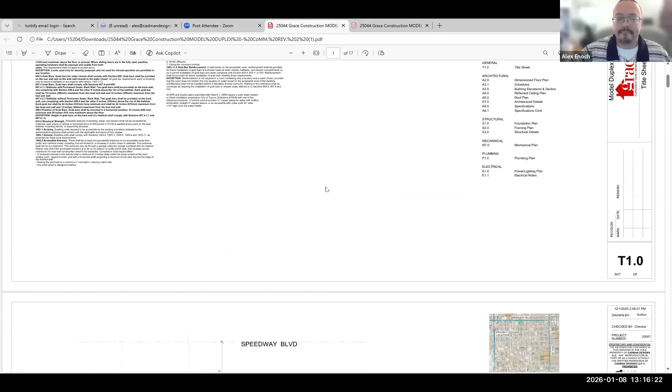Yeah. All right, I mean, there's not a whole lot to go over now that Michael Taku went over it and kind of justified everything. The only thing that would differ from what he described, that I don't think was cleared, is the wall that surrounds the property. We have a 6-foot wall that is solid masonry, but one of the requests from West University was to make sure the wall that fronts 7th Ave, along this side, and blocks in our yard, which is right here, is actually only half masonry, and the rest is wrought iron.

So that way we can actually still visually see the building. But overall, as Michael mentioned, we have Speedway along the north property line. We've offset the building pretty far back from the street edge so that we get away from it because it's going to be pretty loud.

And then, as he mentioned, we have the face of the building facing 7th Ave to create the duplex. And then the request was to do the parking through the alley, so we have the alley here that'll allow us to do the parking here. And as he mentions, a pretty straightforward building, rectangular, white wood.

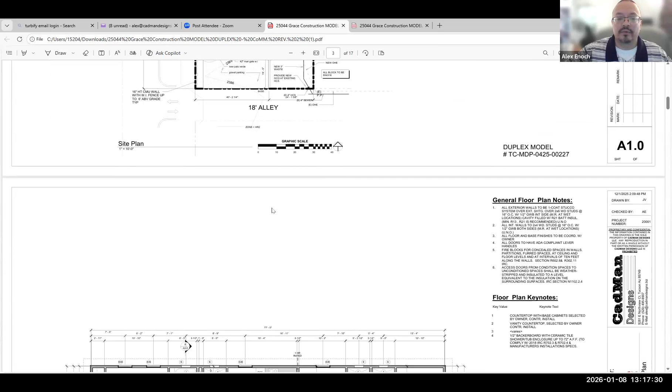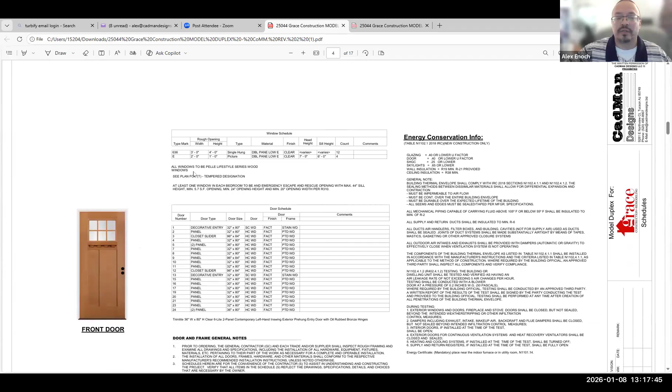Windows. Got one unit at 1260, one unit at 896. We followed the directions of West University, so got the wood door with some glazing on it. We got the Pella wood windows, asphalt shingle roof, pitched, nothing too glaring obvious. We do have the units on the roof. That'd be one deciding factor that you guys might want to put some input on, but the rest of it's pretty much cut and paste. There's nothing too detailed about this building or this lot. Michael pretty much went over everything else.

So I'll leave it open to you guys.

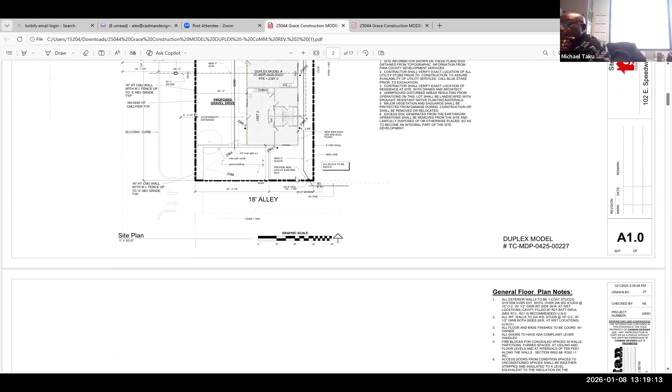So per the guidelines, primary structures need to have porches on facades, especially street-facing facades, and both on corner lots, foundations, things like that. Was that at all discussed? Why were none of those followed per the guidelines for primary structures? The foundation was not specifically discussed during the review in West University.

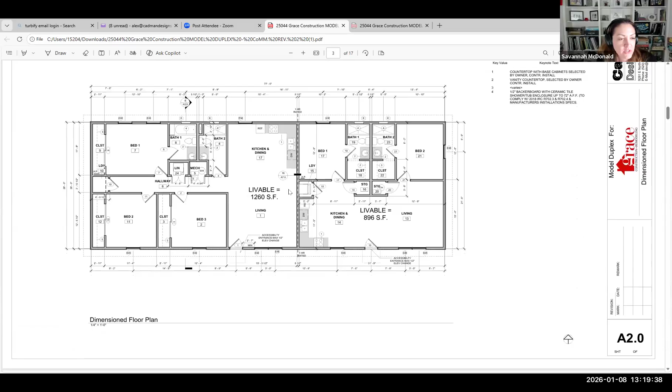And per the guidelines, porches shall be provided on all new primary buildings constructed along street frontages, rear and side porches for buildings located on corner lots. But there's no porches on this building. Correct. Was there an exception for that, or was it just sort of missed? Porches were not really discussed.

Okay. If I make a mistake, Alex, you can correct me. I think it was not discussed. That was never an item of discussion. But I mean, if it's a requirement, we can definitely add it in there. We have plenty of room in what's considered the street front.

Okay, yeah. I mean, just as a starting point, I was trying to make sure before commissioners asked their questions, we understood what the project was beholden to, if it was something different. But I think I understand now.

And then the fences part per university, it's 48 inches height on a front yard, but you're proposing a wall that's taller than 48 inches on the front yard. Yeah, and that's definitely one of the ones they mentioned because of the security, being right up against Speedway. It's an easy to see, easy to hit target house, being that its location. So they were okay to allow us to go taller on that one because of that reason.

But the solid portion is 48 inches or less? 30 inches is what I called it. Okay. Yeah, and then that goes wrought iron the rest. And that's on the plans currently? Oh, 16 inches, I'm sorry, it's right here. Yeah, 16-inch height CMU wall, and then it's wrought iron the rest of the way to 6 feet.

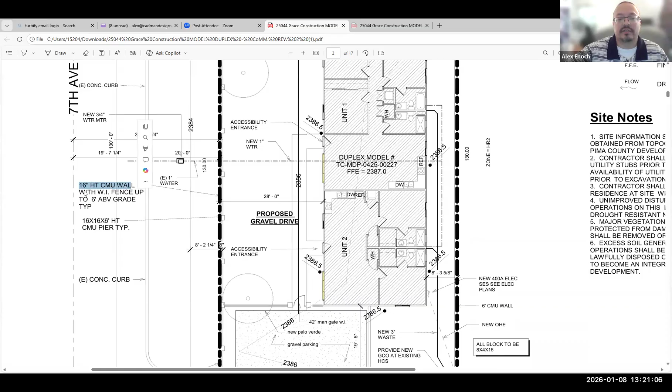Okay, understood. All right, I will let commissioners ask their questions now. Andrew, do you want to start?

Sure. Yeah, I noticed the porch omission as well, and I do think that they should be included at each entrance to Unit 1 and Unit 2. And then the style of that porch, I think the guidelines talk about a wood post on a masonry pier. So I'd want to see something appropriate to the style of the neighborhood, not just a 4x4 post down to a slab. But I think they definitely need to be included.

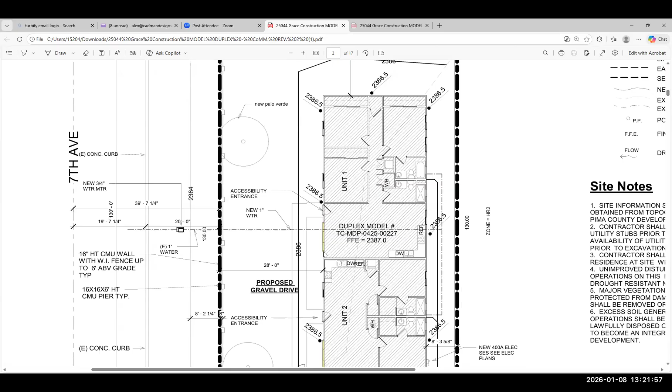And then the only other thing is the rooftop HVAC units. They are allowable, but they need to be placed on the rear of the roof. And right now they're kind of sitting right on the ridge. So I think those units need to be shifted back so that they're as screened as possible from the street. Okay. Yep.

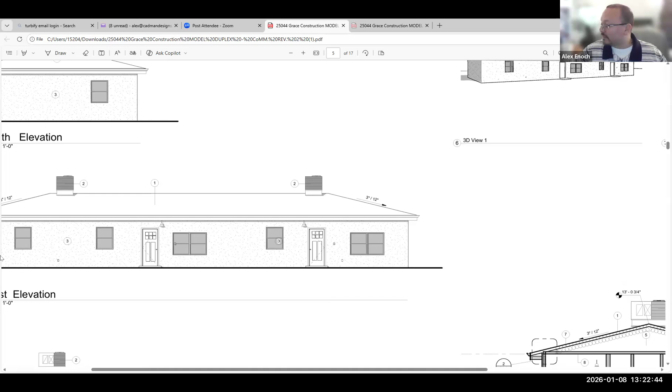The design guidelines talk about window openings stressing verticality over horizontal proportions. Especially on those pairs of windows, I think the sill height is probably okay there, but I'd like to see the vertical proportion a little higher.

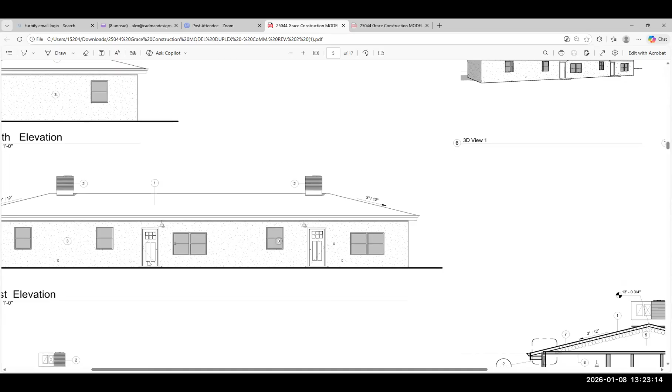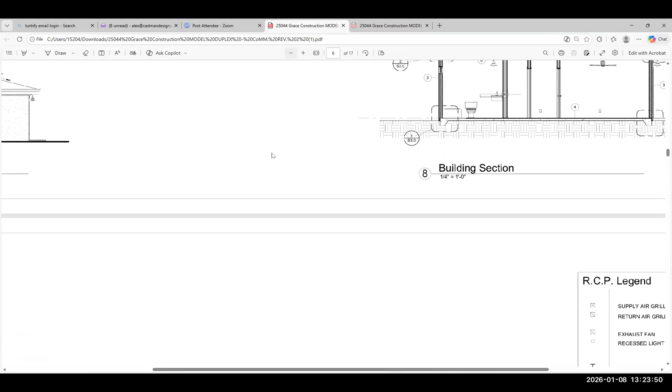Can you clarify the roof overhang? I only saw one building section, and it looks like a closed eave. No, they'll probably just do exposed. That's just the background of the other fascia board showing through. So you've got the fascia coming down, the outrigger, and we do have scuppers and gutters on there. Okay, good, I just wasn't clear on that. The open eaves are definitely appropriate for the area.

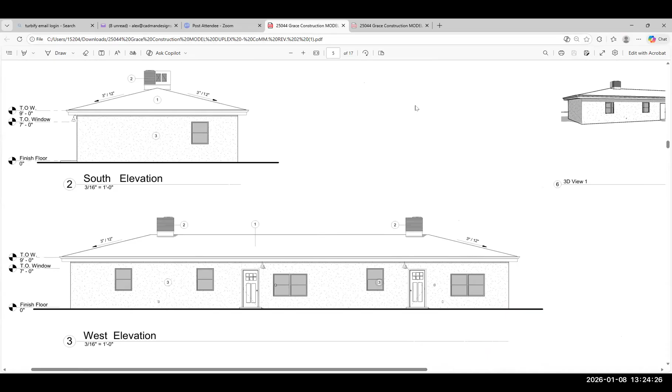I think that's about it. On the windows, I'd love to see a sill, an expressed sill—it could just be stucco, but have a little dimension to it. The no-sill, no-lintel expression is out of character with the neighborhood. You don't have to do both necessarily, but something that'll give it a little relief, a little shadow line there. Okay, and then I think that was it. Thanks.

Thanks, Andrew. Blake? I'll second all of Andrew's comments. I'm just poking around the neighborhood on Google Maps following along. Most of the HVAC units are set back in a way that you can't see them where they're present. Some dimension on this building—porches, the windowsills Andrew brought up—really following the character of the neighborhood is important for making this new structure feel like it fits in and complements the neighborhood. That's all I got.

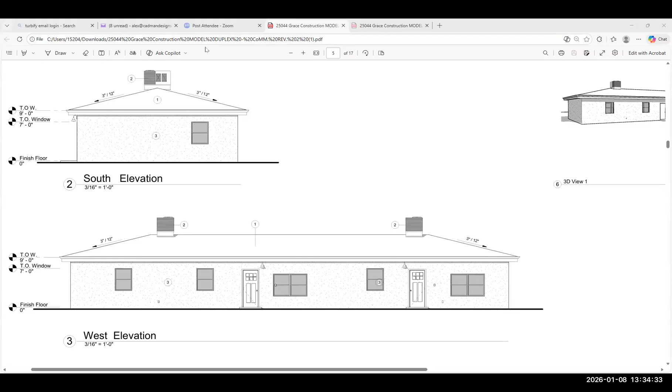No, I think it's probably covered in adjusting the lintel heights to be consistent all the way around. Okay.

I apologize, I didn't allow time for discussion. Are there any more proposed amendments or items? Okay.

Roll call for a vote now. Savannah says aye. Blake, aye. Joel, aye. Andrew, aye. Okay. Great. Motion passes 4-0. So thank you.

Because it is a continued item, Michael, do you want to maybe summarize next steps for our applicant? Well, once Alex revises the plans per this guidance that you have here, he will submit to us as staff, and we will review it to make sure it is actually accurate to what you requested, and then we'll put it on the next PRS agenda. This will depend on when Alex submits the revised plans, and we review, and then we'll put it on the next agenda.

You will not need to go back to West University, Alex. You just need to come back to Plans Review Subcommittee. I got it, no worries. Yep.

Right, that's as little as 2 weeks, right? I mean, yeah, well, as I say, it depends on when Alex will submit the revised plan, so I cannot give a definite date now. Sure, as soon as he submits, we do review things in this office as a team. We'll look at it. Once it is complete, then we'll put it on the next available agenda.

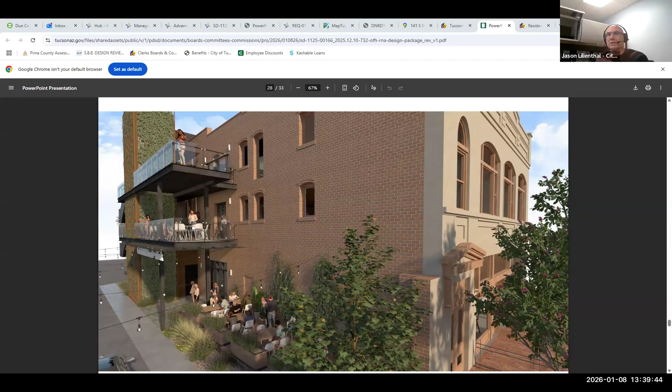That was it. And I do believe, let's see, I saw there's Rick McLain. Yes, yes. Jason, let's go ahead and make sure you can share screen and you can talk about the project. Perfect, yeah, thank you so much for that introduction. Michael, if you don't mind making me host, I can do a... Sure. It should be a good read. Okay, perfect, looks like it just came through.

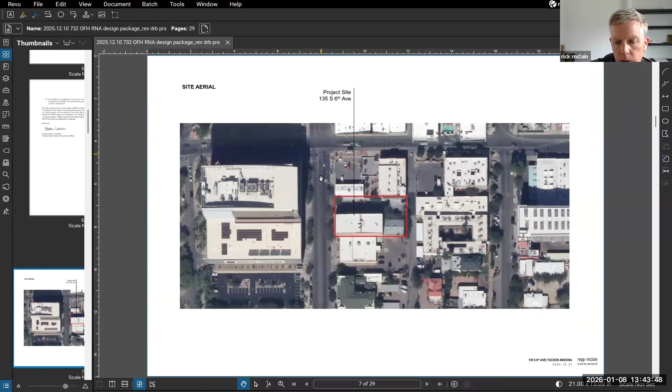So this is the site located here. If anybody's not familiar with it, it's on Broadway to the north and South 6th. It's kind of directly across from the TEP building downtown.

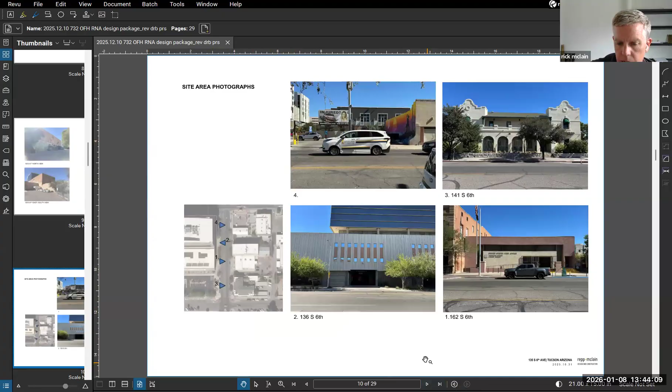Again, these are the views of that west elevation, and you can see the north facade. You can also see on this north facade a lot of the infrastructure that's there, and then the east and south view as well. These are the surrounding buildings that make up the context for that area.

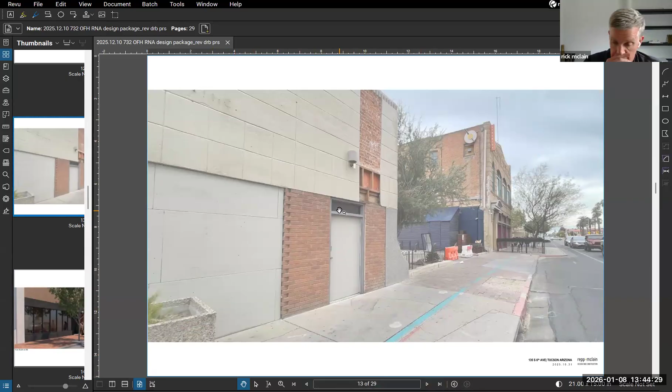When we got tasked with how we would add this egress to this building for more life safety and activate these upper floors, we had a lot of conversations about wanting to maintain this west facade and where we should place these elements. The genesis for the design was to push the stair and elevator back as far as we could, so it didn't visually detract from the character defining feature of the west facade.

The other items we took into account during the design: we wanted the new stair and elevator to be differentiated from the original structure, so it would be very clear what is new and what was original. We also wanted to keep it visually light, making it as transparent as possible so that as much of the existing building could be viewed.

Lastly, it's a separate structure in that it doesn't rely on the existing building for its structural capabilities, so that at any point this piece could theoretically be removed and the original structure could be returned back to its original building.

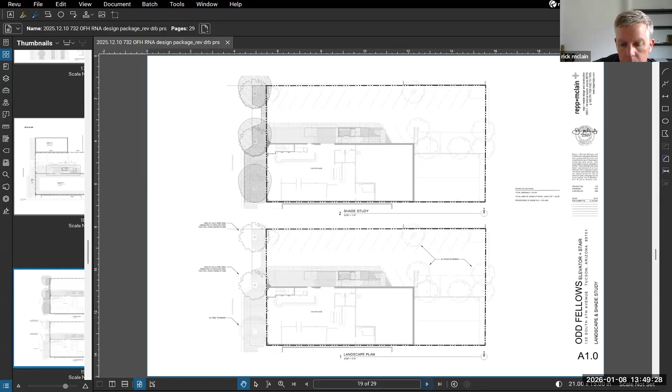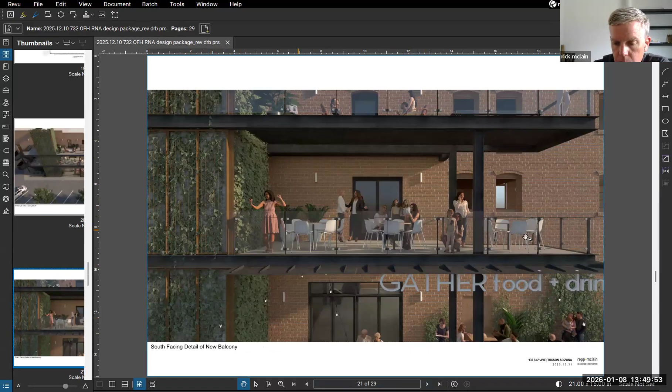And I've got just a few other visuals here. We really wanted to dematerialize this elevator shaft as much as we could. We didn't want to call a lot of attention to it. We thought probably the best way to do that would be to clad it in a wire mesh and let vines grow up it, because it would be a nice, green, vegetated element all the way through there. Again, we've got these glass guardrails so that you maintain as much visibility of the existing building as possible.

And I do have the development plan. If there's any specific questions on that, I think there's probably a little bit more on the development zone. But that's what we're looking at for the Odd Fellows project. Did anybody have any questions for us?

Yeah, I've got a couple things here, Rick. First, I just want to thank you for bringing this project to us. I now have the difficult job of balancing the architecture side of my brain that's really cool and really pretty, and I really like it, versus the historic conservation aspects. So you're making my job here pretty hard. It's always a fun challenge to balance those two sides of my brain.

But the first thing I want to make certain of is, because the digital renderings, the virtual renderings, kind of show this, and then there was another note calling out on the plans an exterior remodel on the west facade. I just want to make sure that's not an overlooked detail, that we're not looking at going and covering up the brickwork that exists on that west side of the building.

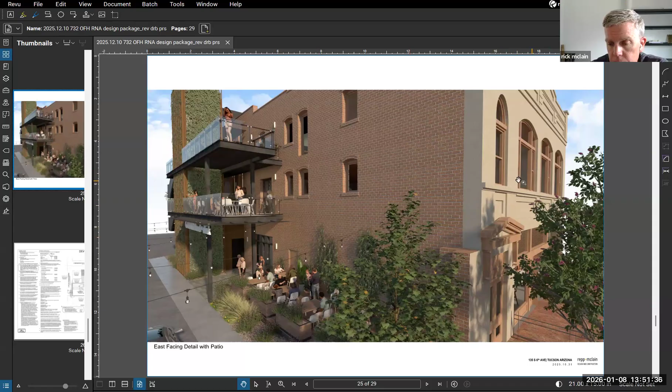No, yeah, I apologize, I'm not familiar with what that note would be, but there's no work planned for that west facade. Great, then that is not an issue.

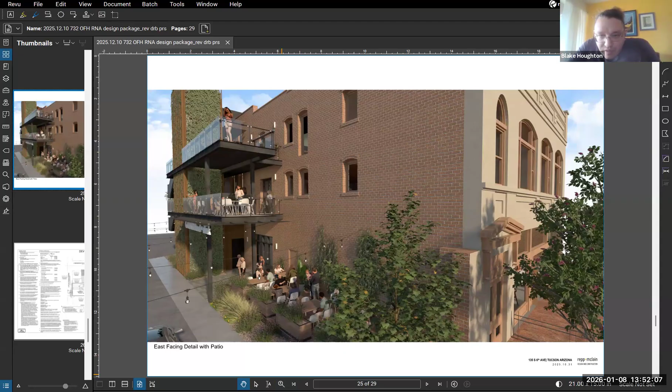It was just on, let me see, because it's a weird little callout I noticed on one of the plan renderings. Let me see if I can find it. On page 24, the exterior remodel is pointing to the northmost window on the west side, that slightly narrower single one, and I just want to make sure. Oh, I'm sorry, that was probably something overlooked during. I mean, I put plenty of these together, and I miss little things like that all the time myself in my own work. I so apologize about that, that was probably just a copy and paste error there. I totally get it, just wanted to check. That was my big thing.

And then my other question was, you discussed planting pedestrian trees. Do you guys have species in mind? What are your plans for that? The trees that were there that were lost in a storm were Palo Verde trees, so we were looking to replace those in kind. Oh, okay, great.

I have no further questions. Okay, thank you so much. Yeah, thank you, Blake. Joel?

No, really, I have no questions. I think it's great. I love the materials, I don't mind the opening of the doors that you mentioned. I'll leave it to you, the professionals on the committee, but boy, it looks like a great project to me, and I appreciate it. Thank you.

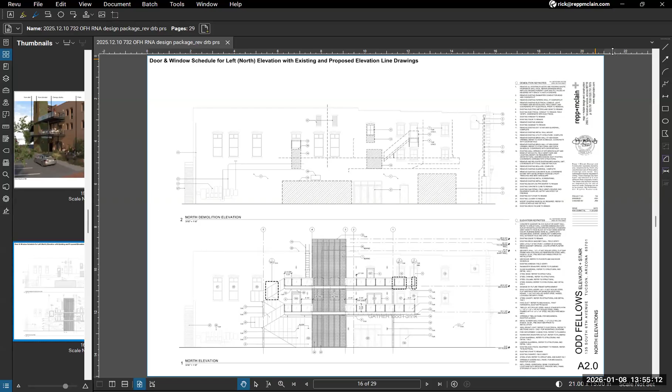But if it's just a replacement, that's perfect. Great, and then everything looks great. Thank you guys, I have no further questions. Thank you, Andrew. Good catch on the downspout.

Yeah, I agree, very thoughtful and well-organized presentation. It's very clear. My only question was a little bit of scope, because you said it was not a restaurant yet, or whatever might be in the future, just left open. Are you doing the lighting now that we see in the rendering, or is that just proposed potential? That's really kind of proposed potential. Okay, just hopefully we're trying to set up a restaurant to come in there and tee them up for the best amount of success. But yeah, that's not quite part of our scope at this point.

Okay, cool. And then the last question was the vegetated wall - it's just the three sides, right? And the side we don't see with the elevator doors, is that just exposed CMU? The side that's up against the building, yes, that would be exposed masonry block at that point. Okay, so it's the other three sides? The other three sides, correct. Okay, yeah, kind of three visible sides. Got it, okay.

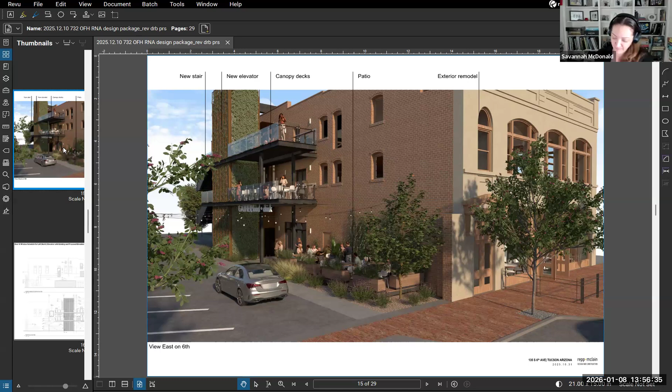Yeah, I think well done, looks great, thoughtful. Any other comments from commissioners? Are we ready to make a motion? Yeah, I'm ready, I can make the motion.

Thank you, Andrew. Okay, on item 4B, SD 11250016, TDDEV 10230043, at 135 South 6th Avenue, I recommend approval of the project as presented. This is Blake, I'll second. Thank you, Blake, any discussion?

Okay, did it right that time. We'll take a roll call vote. Savannah, I say aye. Blake, aye. Joel, aye. Andrew, aye. Great, motion passes 4-0. Again, we appreciate it, Rick, nice work. Thank you all very much. Appreciate it, thank you.

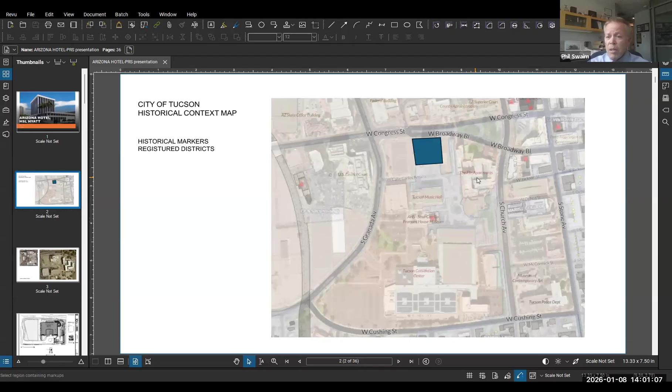So anyway, I think it all should be coming together well. As you may know, this is on Congress on the north side of the convention center, so it's connected to or adjacent to the historic plaza within the convention center. We've been working on that with Eric Barrett and the city, getting that restoration done for several years. So we've got a lot of passion for the area and are excited about this building coming and connecting to that plaza, really taking advantage of this part of the community.

The HSL does actually own all the land from Granada to the east of the historic plaza, but they're three separate parcels. The west parcel is vacant - it used to have a parking garage on it connected to this building with some bridges. It was getting a little dangerous to park in, so they brought it down without it coming down voluntarily. There were also some older buildings on the east side that didn't quite match the elevation of the plaza, but those also were having some problems, so that has been removed.

We're actually anticipating a future housing project, so I've done some planning to make sure that we're not interfering with that. But as you'll see, we have a driveway that will be coming through on that side, as well as a nice connection that will cross that to get to the plaza, to really make an integrated design here. We had the opportunity...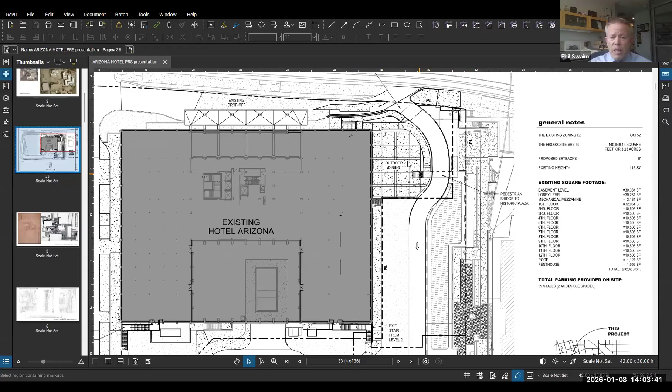We really like the idea of these plazas. I think the whole fabric from the corner in front of the old - well, I guess it's the Flin now - but certainly within the convention center and here, I think to be able to continue this form of plazas makes a lot of sense in the fabric of this part of downtown.

So we are minimizing what we're doing - the improvements on the east side there, knowing that from the plaza or the patio we're doing, that would be demolished by the future housing that will go in there. But we are creating a connection that goes around that side of the building.

We had the opportunity to meet with the landscape subcommittee a couple of weeks ago to get their feedback because of the connection, and that went very well. Some good input there, but we certainly wanted to be able to continue the conversation with you.

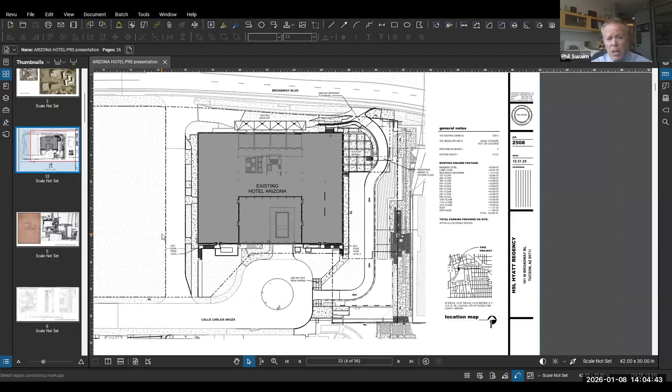Unless there's questions right now, what I thought I'd do is pass it over to Eric Barrett so he can touch base on the site, to cover what level of detail you'd like to hear that we spoke with the landscape subcommittee about. And then Tim will come back and talk further about the building itself.

No questions. It's fantastic, Phil. Great job.

Okay, so as Phil and Tim referenced, basically this is a connection of the historical plaza, which wraps around between the Flin and the hotel shops, or it became like office spaces, which is now that vacant land area where now we're proposing a new patio space that's going to tie to the hotel itself. But it also wraps along the southern side along Calle Arruza and the roundabout itself.

So you can see from the historical concept documents that we're referencing here, what we did was rotate these drawings to maintain north, so we're not constantly doing this back and forth, trying to keep everyone oriented on what we're looking at. So really the historical design had a lot of massing, a lot of species and plant material, but also massing of materials between brick and concrete, using banding and other components of that.

So we are obviously not duplicating those inspirations, we're pulling from them but not duplicating them.

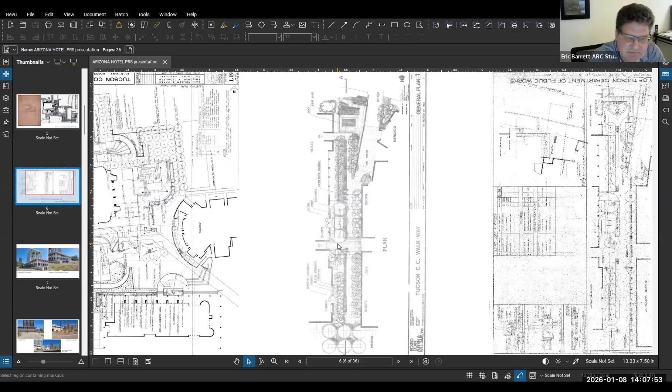There's also another connection about halfway down midsection that's tied into the existing shops that were there. One thing that was brought up that I wasn't even aware of is that used to be the old intersection of Main and Ochoa. Is that correct, Tim? Phil? I think that's what it was. Not sure, but that was a critical component they're looking to maintain, and obviously we're looking to maintain it because it's tied to the historical landscapes.

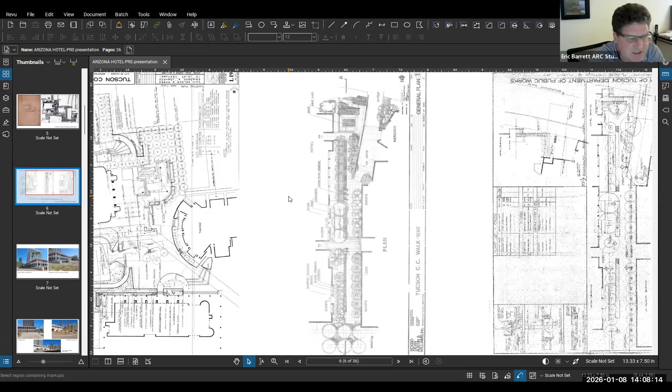Next page, I'll go through this as quick as possible. So just some reference photos. You can see there's no ADA access really along up into the hotel currently.

From the west side. Right, this is Broadway. Broadway's just off, that's the music hall. This is the west facade of the building. The primary entrance is on the north side and it's up a little bit from Broadway, but then there's a lower level that connects on the west side here as well, and then it comes back up again to the music hall.

As far as the historical landscape, all we're looking to keep is the palm trees. They were a significant component, a historical element at the north or northwest corner, and then the ones in the roundabout themselves. You can see different perspectives of that. Otherwise, the vegetation around there has changed, and quite honestly it's a lot of weed species now, nothing we're looking to maintain.

The photo in the upper right here shows the connection between the two lights and approximately where we're looking to tie in our connection to the patio space that's going to be connected to the hotel itself.

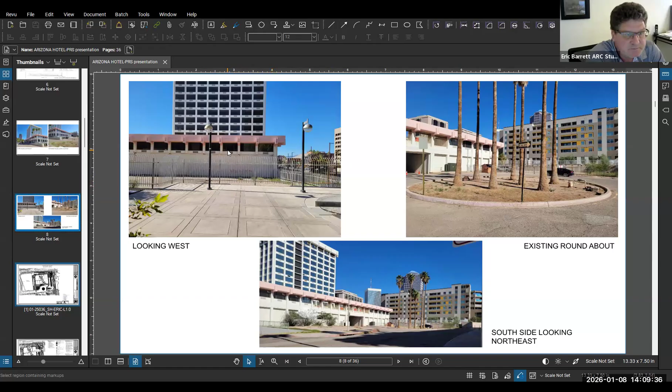Next slide. This really shows what we're looking to maintain. With the current code requirements, we're trying to provide as much shade as possible on all public hardscape areas. So we're working to provide a row of trees along Broadway and a very narrow planting strip in there, removing the oleanders and providing a much more desert-friendly landscape, but still somewhat desert to subtropical-ish, I would say.

Along the west side where the private drive is, we're looking to provide a nice shaded walkway because we believe that's going to become a significant walkway connecting not only to the garage but also to the music hall itself, and then the patio space coming along the north, down the east side and to the south.

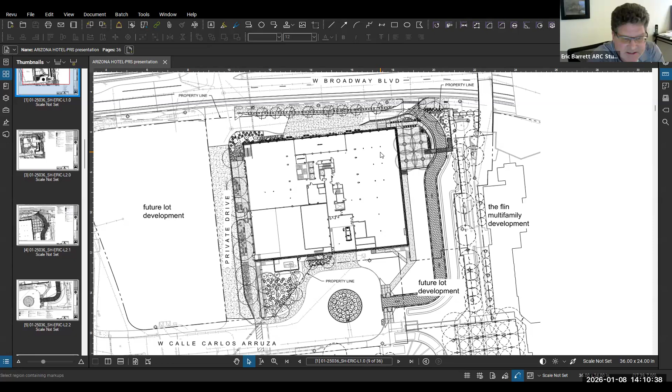For the roundabout itself, we are looking at two options. I think I want to jump down to the detail, sliding farther down. One more page, last one.

One of the discussions we had with the Historic Landscape Subcommittee is what this roundabout needs to look like or should reflect. In the discussions, it was talked about providing grass, artificial grass, or a massive green planting, similar to what we did along Church Avenue, where we did mass plantings of ground cover to provide that green mound effect and some screening component.

Our thought is that real grass probably is not a good idea, and we would really discourage it. I'd say the city of Tucson would also discourage using any real grass, primarily due to water use, and second, who's going to mow and maintain it. We don't want to put that burden onto anyone if we can avoid it.

The second option would be to use artificial grass and do a slight berm up, restoring that historical context amongst the existing palm trees, and possibly incorporating some lava boulders to reflect the historical content. Artificial turf has pros and cons, but the last three times we've tried to submit with the landscape subcommittee using artificial grass, it's basically been a no-go.

I think our best option is to go with a mass planting of what's called emu, or desert winter blaze, combined with an evergreen ground cover that we could mound up around the existing palm trees, providing a mass planting 6 to 8 feet in diameter for a nice green effect. This design reflects that. There are pros and cons to both options, and we're just being fully open and transparent about the possible intent of using that space.

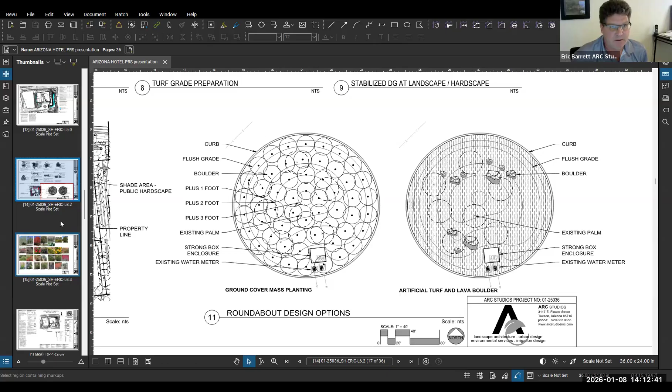The next page shows a series of images of proposed plant palettes and species. Basically all these plants have been used on the TCC campus in some manner, so we're looking to carry that theme throughout the whole downtown core.

I'll turn it over to Tim and Phil for additional building discussion, and then we can revisit whatever you want to talk about. I want to look at this northeast corner a little more closely, just so it's clear what's going on, because there are a lot of different elevation issues we're resolving.

This is the northeast corner of the hotel, the end of the building, where the porte cochere, the entry driveway, comes back down to Broadway. We're narrowing the drive a little bit and creating a pedestrian connection down to Broadway that's actually accessible, since currently everything is too steep.

From the front door of the hotel, we're tying in with a ramp that comes around, becoming a retaining wall, because this wider driveway is going down at the same time the ramp is coming up. By the time we reach the bridge height, we're within a couple inches of the historic plaza elevation, so the bridge slopes up and connects.

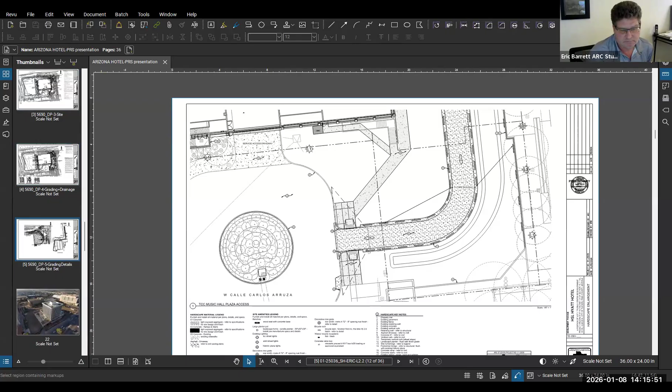So we'll look at a little more of the context of the existing building. Here's Broadway, this is the north facade. There's the plaza, so our bridge will be connecting right in here.

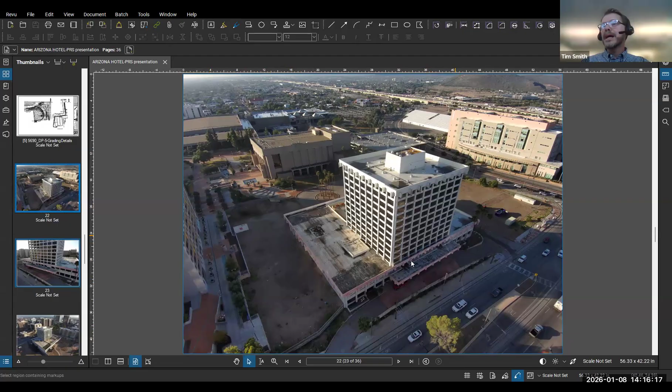You can also kind of get a sense of some of the things that have changed in this building over the years. Looking at the added color, these horizontal bands weren't in originally the way that the building was set up. There's been some little adds. While these little design elements are original, the ones along the porte cochere were added, so they're in stucco and they're not doing great. So we're proposing to remove those added ones.

Obviously, you can kind of see that there's an awful lot of work that needs to be done just to get the roof draining would be wonderful. But we are proposing to remove and replace the glazing system.

We'll zoom in a little bit here. So there's columns that are wrapped in a metal panel system. Those verticals are definitely going to be staying, but this glass is all single pane and aluminum frame and metal panel. So as we reinvigorate the hotel, we need to use glass that will be energy efficient. So we will be removing the glass and this horizontal panel and then putting it back in a more vertical configuration. We'll look at that in a moment.

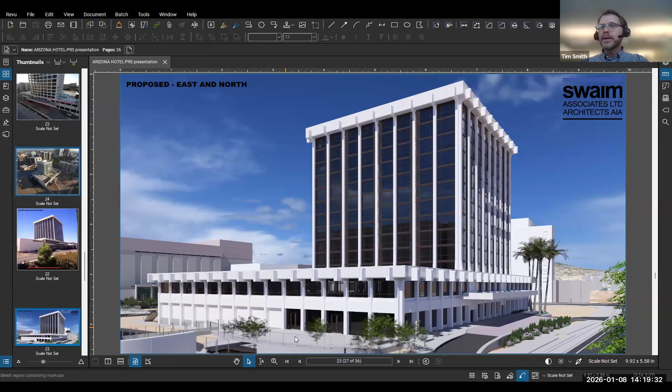And then that plaza or that patio area with the ramp up and the bridge over to the plaza.

This one's looking at the east side and the south elevations. So this is kind of looking at it from the historic plaza. We do need to add egress stairs off of this level, as there's guest rooms, so we'll be adding a pair of stairs off the south of the building.

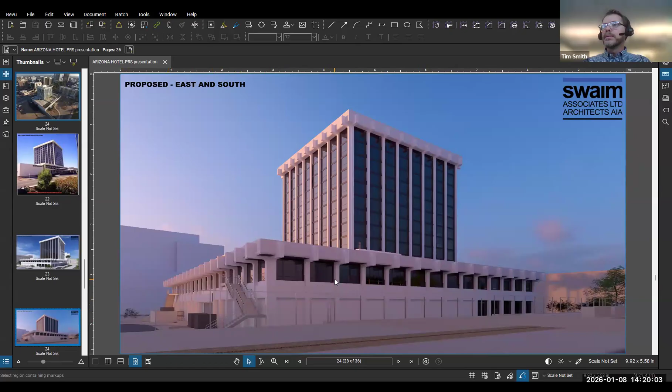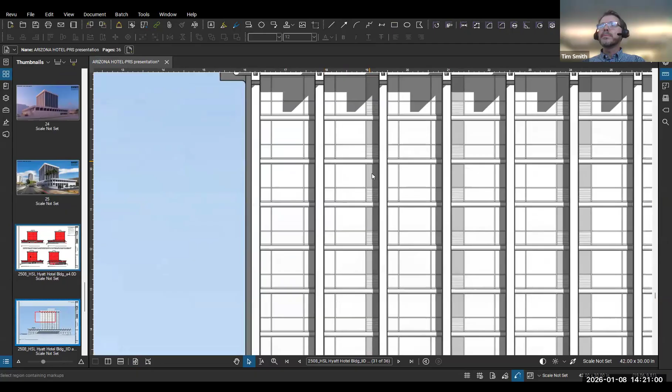Then just real quickly, this is kind of showing the demolition, where we're taking out that full piece of glass in each case, but then the verticals stay. So what ends up happening then is that we replace that with glass and a spandrel glass piece so that the mechanical units are vertical. That will be a dark bronze, aluminum colored frame system similar to what's there now, but with insulated glazing.

So this is the entry side on the north, the east side where our raised seating area, the patio is.

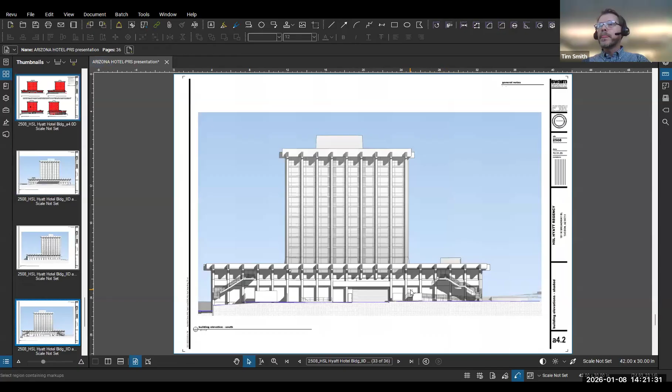South side, so you can start to see the stairs and pedestrian connections that we're adding in to be able to get that egress out on both sides.

And then the west side.

And as was mentioned, the development package was just submitted, so the city is kind of working through identifying all the pieces of the puzzle, but we knew that eventually we'll officially get here. So we wanted to get any thoughts or concerns, so that we can address those prior to the official submittal. So are there any questions, anything you'd like a little more detail on?

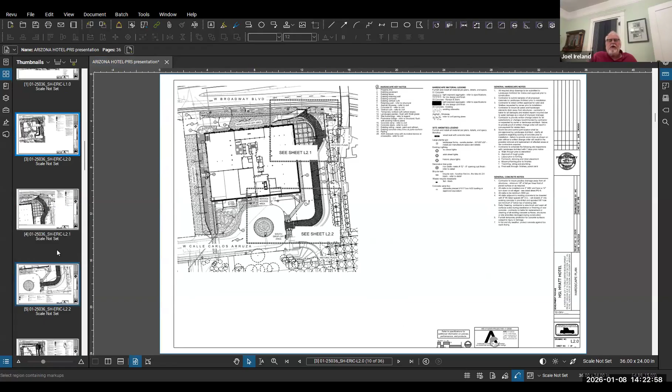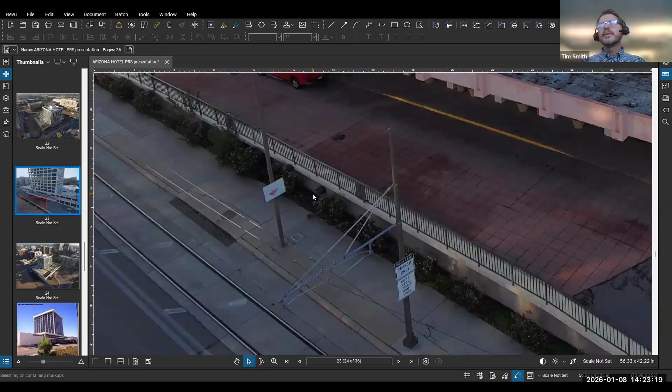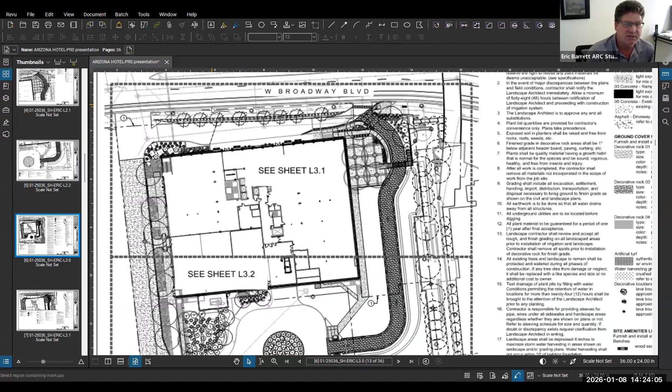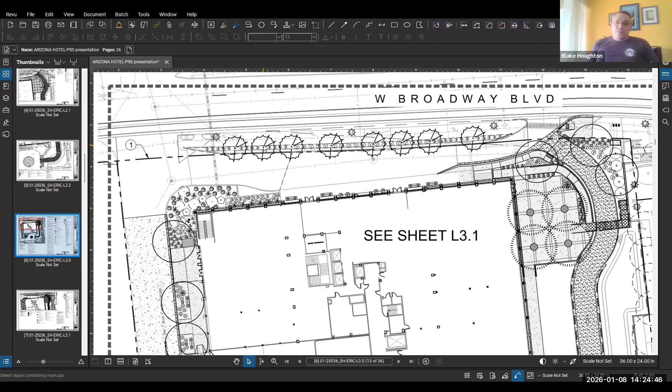There's also the adjacent light rail with cables and everything else, so putting in oaks or other large trees just won't work in that location. We need a very skinny, upright growing tree, or one that doesn't have a large root mass system—anything but oleander. And Joel, something too—with that being the north side, the tower is going to cast heavy shade almost all year, so they'll really be struggling to find plants that tolerate that condition.

Yeah, all right, good deal. And then I have the same question about any specific detail on the mass planting on that mounded up turnaround. Oh, so that's now called emu bush or emu shrub. It's actually been utilized as an evergreen—I don't know if you guys know what myoporum is, do you know what that plant is? No? So basically we're just trying to create a ground cover-ish green plant that doesn't have a lot of flower or show to it.

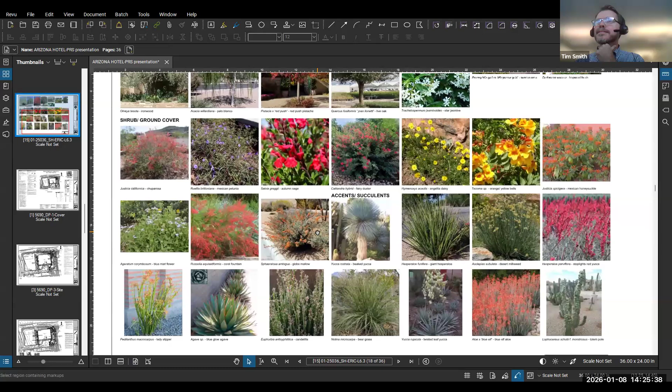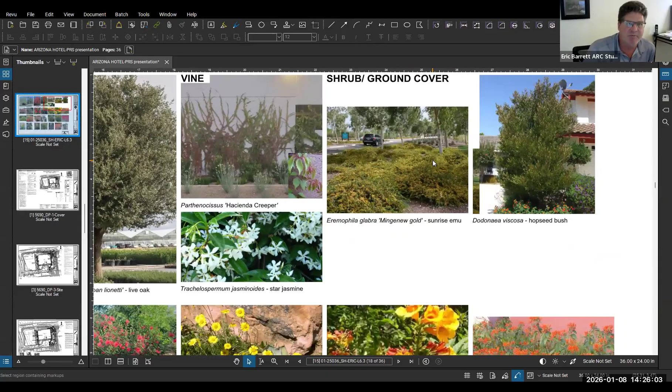And then my last question—along the way you mentioned a water feature. I'm not sure, is it existing or are you going to build a new one? What were you referring to when you mentioned a water feature?

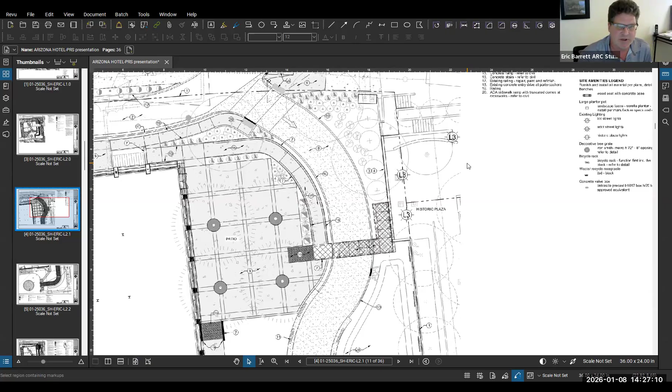Sure, so the historical landscape has an existing water feature—that arch is the existing water feature. The overall design has a procession of water in its use; you can stand to the south and look directly up to the north toward this water feature. It's a very simple water feature with a back wall and an art piece currently existing there. We're not doing any new water features—this is all per the historical landscape that was restored, started in '19 and finished around 2022.

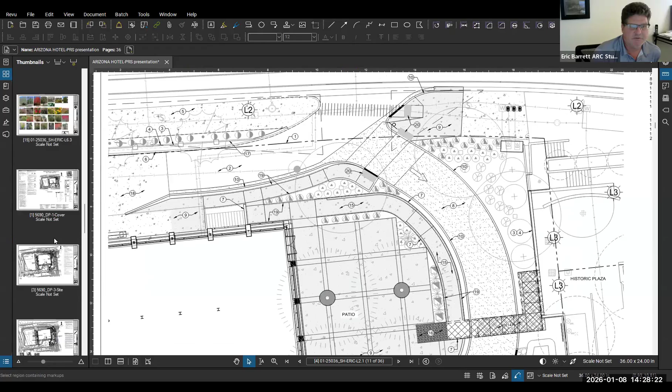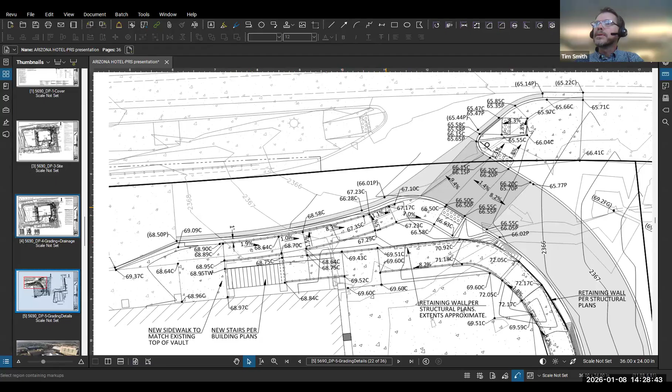I could probably find that, somewhere in here. So the crossing along Broadway is obviously no railing, but as you get to a flat area, we have a landing, and then we have ramps to get up to grade. So it is at 8.3%, so there is a handrail and landings between those portions.

Would the intent with that railing just be to match the existing railing at the front of the building? That's a good question. We had started talking about what kind of railing we're using for this bridge and for the stairs we're adding. What we've been talking about using is more of a cable system so that it's clearly a more modern addition, and I think we can be consistent as we get this bridge, which is going to be fairly prominent.

This will be almost 10 feet above the driveway, and then it obviously gets back down to the current slope here. But that will also keep it very open, so we have that openness so it's not enclosing things or feeling like a cage, but it's also a more contemporary addition. So that's the current thought.

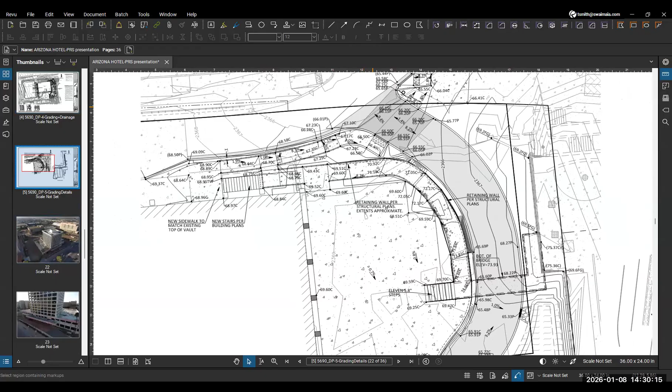Okay, yeah, I think I agree with that line of thought, to differentiate it and make it clear that it's a new addition. Are you gonna do anything particular with the paving there as it crosses the drive? Maybe just to- oh, at the main entrance it looks like there's a pretty tight grid of control joints to that concrete. Are you gonna carry that language over on any of this?

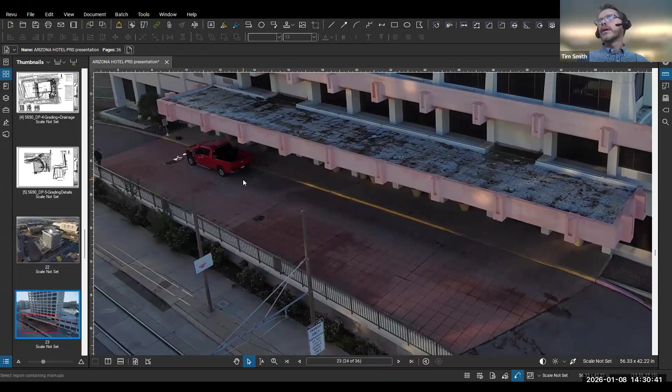There's been some discussion back and forth as to whether it should be reflective of the historic plaza as far as the score joint spacing. This is right around the corner from this, so it's kind of a light red integral colored concrete with probably only about 18 inches on center scoring.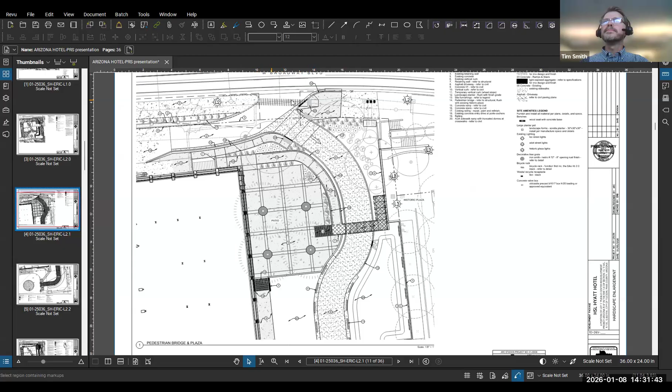Okay, were you asking about the crossing for the intersection where the crosswalk passes at the driveway? Yeah, that one. Okay, then, the lower one, is that a grade crossing or is that a bridge over the drive? This one, further south, where that ramp goes down, curves down and then crosses perpendicular to that.

It's a bridge, right? That's right, this right here, I'll just circle it, that's the bridge. So that's about the pedestrian foot level, almost 10 feet above the road underneath. So that's how we're getting it up to the plaza level.

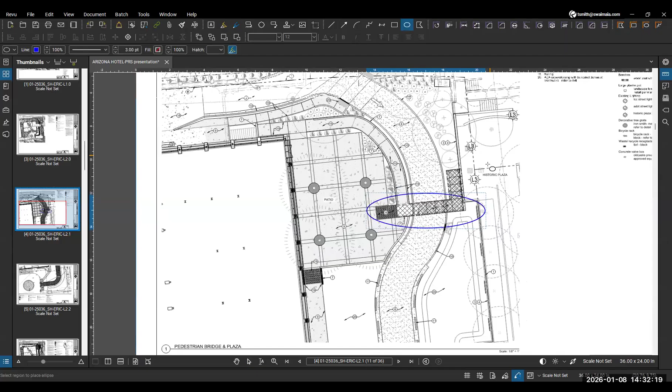Okay, maybe I missed it. Do you have any idea of the design of that, the material? So we're looking at a concrete retaining wall so it'll be fairly consistent with the adjacent surfaces, but then this would be a steel bridge. We're looking at a fairly simple tube steel kind of stringers on the sides, and then the cable guardrail on top of those tubes.

Since it's only a pedestrian bridge, we can keep it pretty minimal, and it's just going to be spanning between them. We'll have to have some columns that drop down on this east side so it's self-supporting from the plaza, but then we'll have an expansion joint where it connects to the plaza level. Okay, yeah, I'd be interested to see more of that.

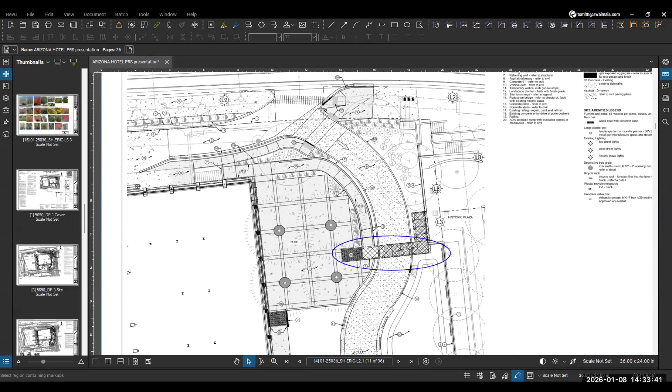I don't know if I have a strong inclination one way or the other on doing something really simple and deferential. But there is, as part of the context, that bridge over Broadway and Congress that connects to City Hall, which has some nice brutalism going on. I'll be interested to see how those design elements work together in context, but I think the pedestrian bridges are definitely unique to this part of downtown, so they need careful consideration in terms of their design language.

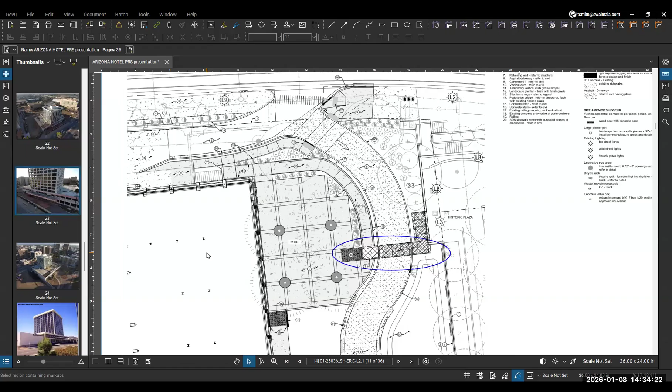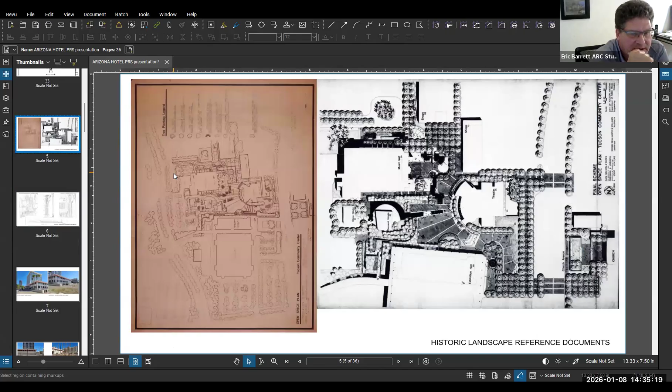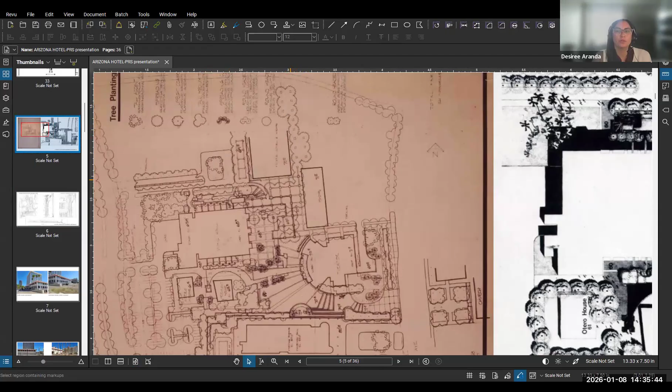So the north-south walkway plaza space going up along it. If Michael can provide me access to share, I can share Map Tucson if that's of interest. That would be great - I wasn't sure how we would eventually review that. I know this is a courtesy, but you're not demoing anything of the historic portion, is that right?

Can you all see that? Can you see my screen? Okay, so the blue here is that historic district - that's a National Register District. You can see it's really kind of just this edge, pretty much adjacent to it. The edge, and the roundabout was within that? Yes, the roundabout - is that right here? No, it's right in the center, back, just that blue spot. This area, right? Okay, because there are multiple parcels.

Currently it's two parcels, so the roundabout is directly west of the one you've got highlighted right now. It's dead center right there, like right here. So yes, this portion is actually in the district, and then the rest is pretty much just adjacent to it. Okay, that's good to know.

I think you guys have done a great job responding to the context. So I was just thinking, in the final design, knowing exactly where that boundary is and confirming we're not removing any hardscape or landscape within it, just enhancing it, right? Let me share the screen. I think you're absolutely right, we should make that very clear.

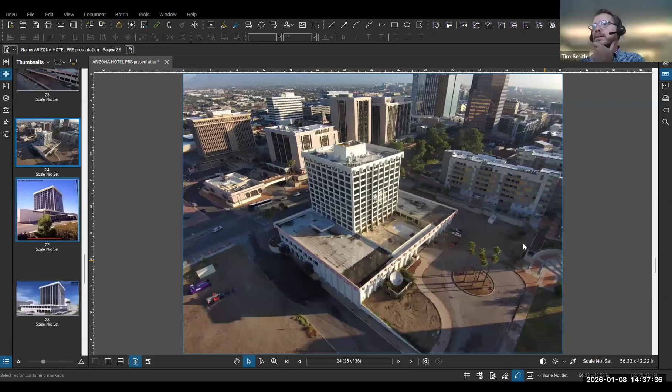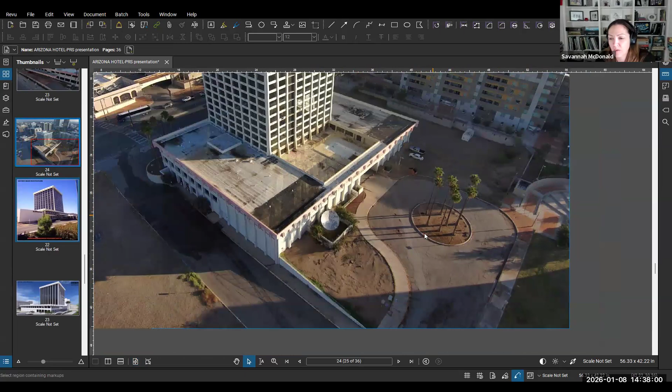Here's the aerial view of that. That border - I think we'll have to figure out whether it almost looked like it was including some of this piece of the puzzle. Certainly that's the focus, that's what Eric was primarily talking about. And then the connection, because this is the music hall off to the south. Currently it is our intention to remove the satellite dish and the additional oleanders. We do have to have a generator now to meet current code for emergency loads, and that will end up going out in this area.

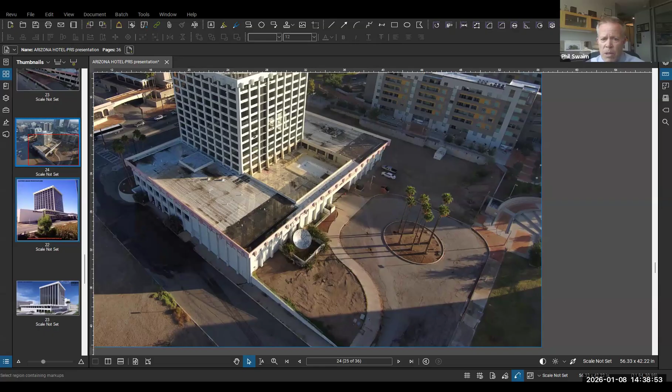Desiree, why don't we work with you in the meantime to confirm those boundaries? Because when we did the National Register application, the roundabout was included, but not the right of way or that dirt area Tim was pointing to. Okay, yeah, we can clarify. Sometimes Map Tucson isn't super precise, so we could do that. I think your points are well taken, because there's a couple of overlaps on the south end of the housing parcel - in the southeast corner, as Eric pointed out, there's a couple of spots where the historic plaza overlaps on the east side. So I think that would be good to work out for the committee to share.

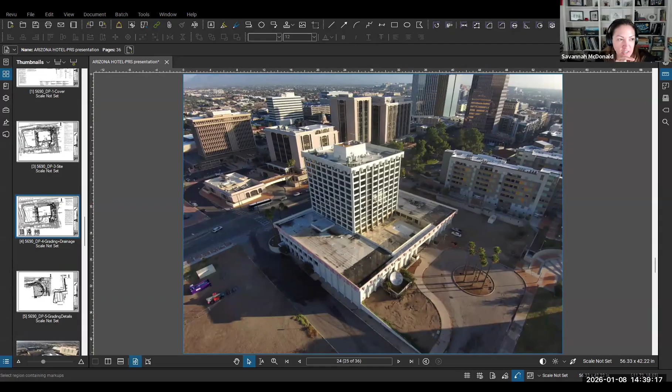Yeah, that would be great. That would be appreciated. And then the final question I had was just to try to understand where the future building goes. Is it just that southeastern parcel, or does it start to stretch north too into that other property?

So that space—this won't work. So this is our patio area, and that really is the northern boundary of that future building. The goal is to create this so that we've got that north edge that starts to get into that pedestrian connection. And then from here on down is where that future building would go. So it'll come down close to the south boundary.

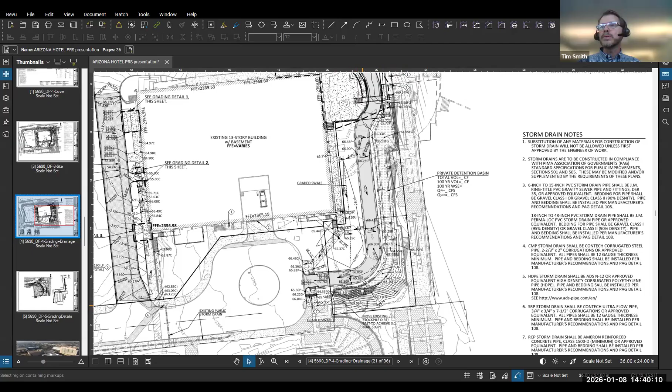But there's currently the retaining wall of the plaza down there. So I think zoning will really define that edge, but you can also start to see where the plaza is overlapping by probably 4 or 5 feet into the property line at the south there.

Okay, thank you. That was what I had. Again, it's just courtesy, so we'll see you again eventually. Are there any other comments from anyone on the commission? Parting words?

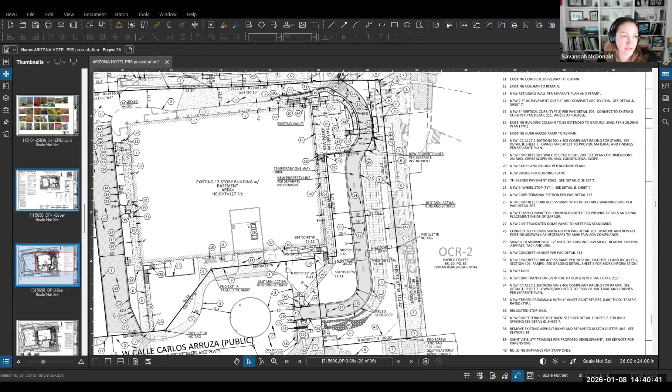Oh, well, thank you. It was very helpful, thoughtful work. Thank you. Appreciate the opportunity. Thank you. Thank you all. We'll see you soon. I'll see you soon. Yeah, we're excited. Desiree, we'll coordinate to get together with you right away so we can have time to get that clarified. Those are good questions. Okay, sounds great. That's great. Thanks. Thank you. All right, thank you.